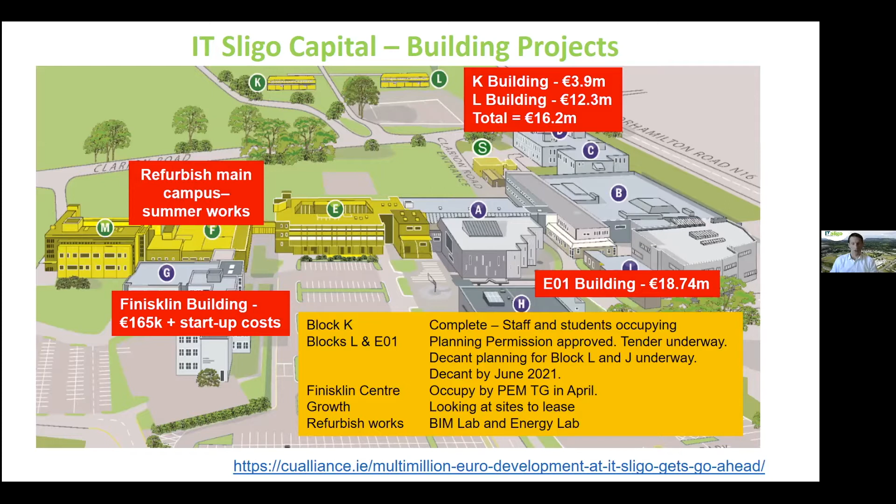There's also activity down in Finisklin, where we're looking at relocating the PEM Research Centre. There's future growth in terms of apprenticeships, and we're looking at some space at the moment to occupy. As part of the refurbishment of our existing facilities, we'll be putting in a BIM lab, which will have AR and VR facilities, as well as multidisciplinary collaboration opportunities with large touch screens. We're very excited about that initiative.

Just to fill you in, IT Sligo has been one of the pioneers in terms of online learning over the last 20 years, and I know all third level and secondary level for that matter have had to switch over to online delivery.

During the last number of years in particular, our department has strategic partnerships with various national bodies for the provision of education on a part-time basis online to various cohorts, including TII, the Local Authority Services National Training Group, Irish Water, Department of Transport, and SCSI.

In addition, professional accreditation is really important to us in our programs in terms of quality assurance, and also for graduates to have international recognition of their qualifications. We have recognition with SCSI for Quantity Surveying and Engineers Ireland for the engineering and civil engineering related programs. CIOB accredit all of our construction management related programs, and CIWEM accredit our water and wastewater programs.

This diagram is a progression path map of our online portfolio of programs that we've developed over the last 10 years or so. We have the largest suite of online part-time programs in the country relating to construction. Over to the right, we have construction economics all the way through to level 9 via quantity surveying, up to specialization in M&E quantity surveying, which is a new program delivered over the last year in collaboration with SCSI.

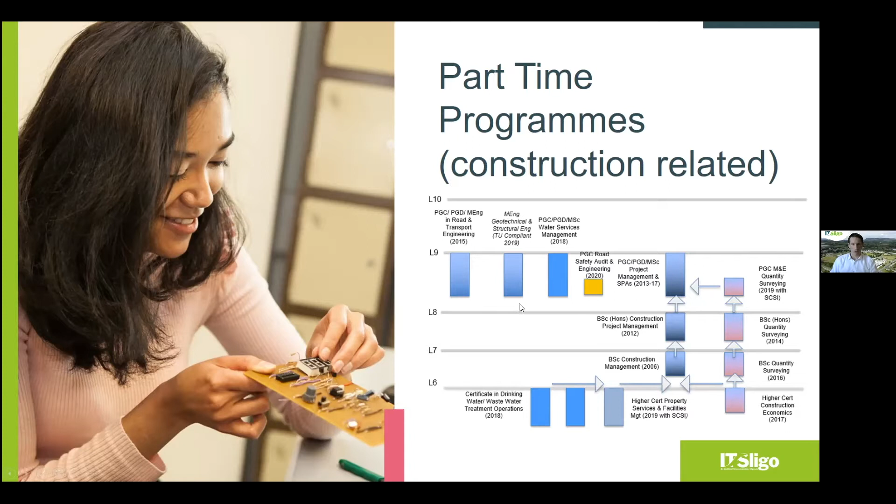And we have a TU compliant master's, which has a 60 credit dissertation in geotech and structural engineering. So there's great progression paths in those offerings that we have at the moment for anyone looking to upskill.

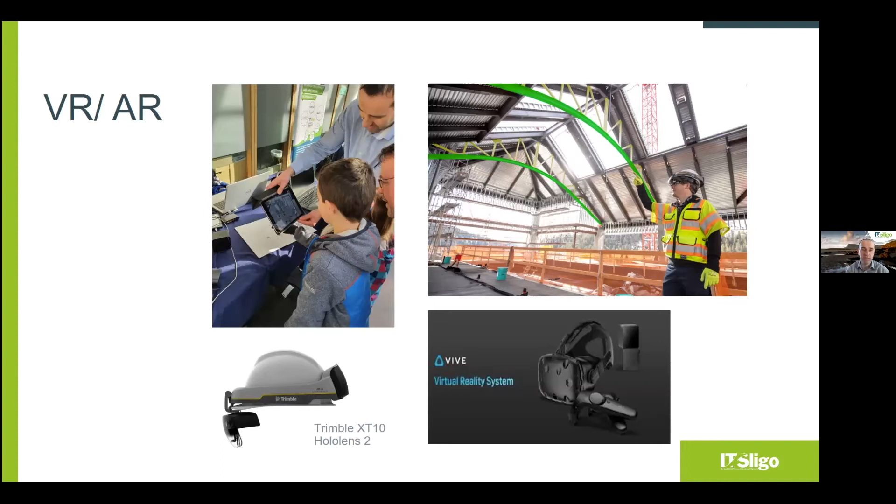That links into what Trevor mentioned earlier with having the BIM studio hopefully set up - we'll have a designated location where this technology will be, and we can have access to it. There's a lot of talk about a post-COVID approach.

As part of this, we have a new course that has been approved and will be coming online in September - a certificate in digital construction technology. It's a level 7 course, and this has been developed based on feedback from industry, giving a base level of understanding of BIM and BIM fundamentals.

It has 3 modules. It's designed to be delivered online as a part-time course, and it goes through building technology and building services, and in semester 2 it has a BIM and collaboration approach, and then a commercial construction element, linking in the geospatial approach from a surveying aspect, making sure that if you are working in different building models, they are working on the right coordinates, actually in the right location and not out by a different coordinate. That geospatial aspect is becoming increasingly important now, because a lot of it's been designed off-site and in a cloud-based approach with the use of BIM.

So that's hopefully that will be available. The website will be updated soon. So that's a new course and a new offering to industry, and that's based mainly on industry feedback. That's a very positive thing.

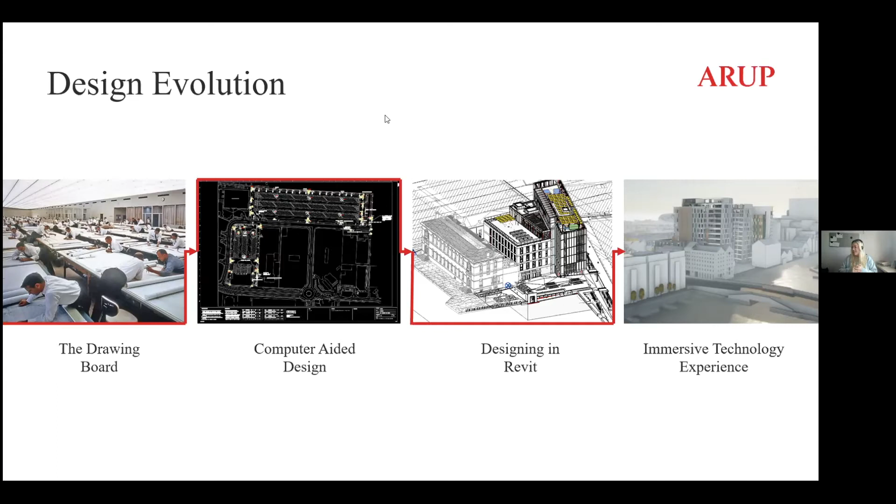This image, I stole off a colleague because I thought it was really great: the world's most valuable resource is no longer oil, it's data. Technology has increased so rapidly that we're completely immersed in data, and how we manage it and sort through it is so important. This is kind of what this talk is going to be about.

This is just a sample of what we use at ARUP during our design stage, but the next slides are going to talk through how we manage data, how we calculate data, and how we also coordinate and do clash detection.

Our main software that we use is Revit. I think like most consultancy firms, when talking about how we manage data, it is a database of structured data, and everything we use, like automation tools and software, is all linked to Revit. Before we had Revit, it was CAD, and that was unstructured data. Everything was 2D, and what you saw was the information that you got. It's just such a great tool for managing your information.

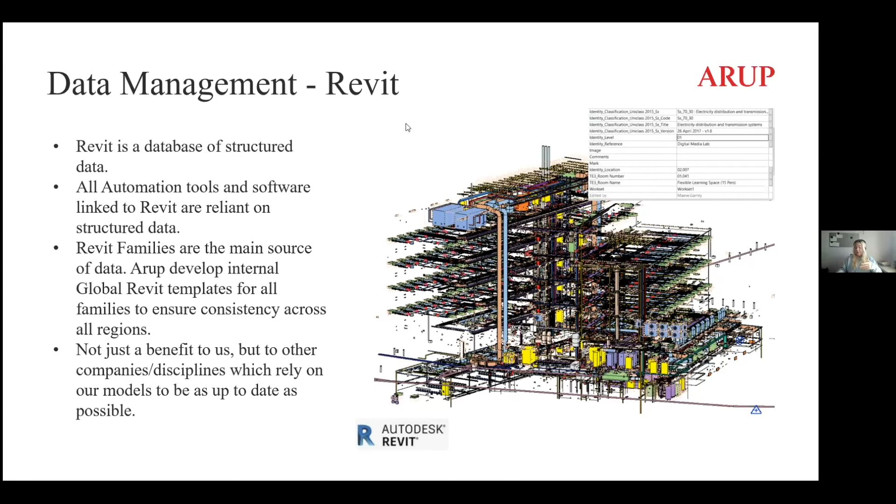Our main source of data is our Revit families. Internally at ARUP, we have teams that develop Revit standards and templates for our families, for our schedules, and for our checking views. That really ensures consistency across the regions. That's great not just for designing and for having our drawings consistent, but it's also really great for our automation tools, because if you have a Dynamo script that relies on certain parameters within families, that means all of our offices can use this Dynamo script, since we're using the same families and templates. It's a really great tool. It's not just good for us, but it's great for other companies and other disciplines that work with us who rely on our models being as up to date and informative as possible. It's a really well-rounded tool.

The first add-in I'm going to talk about is our Revit scheduling tool. Scheduling in Revit is really powerful and can be a great tool to use, but if it's not planned out ahead of time—at the very beginning of your project, figuring out how you're going to sort out your data and plan it—it can become a bit of a mess. You might end up with schedules that are half filled out, and you'll have to manually fill in all of these schedules.

Because it may look like Excel in your Revit schedules, it doesn't work like Excel. You have to fill every single cell one by one. So using RF tools and parameter transformers really streamlines this process, because you can export families and their parameters.

So what I'm explaining here is for circuits, looking at distribution boards. You have rows of circuits and all their parameters and information. You pick the family you want, using circuits, and pick all of the parameters that are going to be in the schedule. You export that to an Excel spreadsheet where you can filter and fill out the information really quickly and efficiently. Then when you're finished, you push that back through the parameter transformer, and it pushes all that information back into those families, so all of the schedules are filled out.

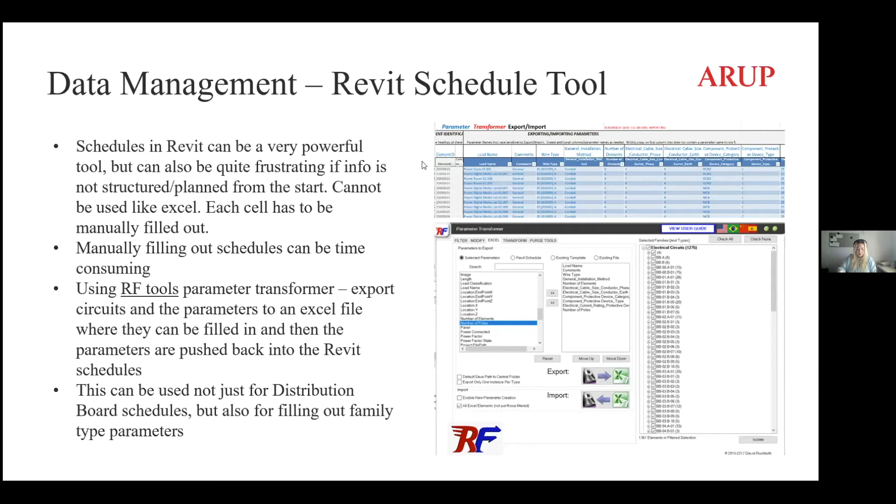So the next thing is checking schedules. For checking schedules, I think in ARUP we use checking views a lot. We have internally generated checking views that are layouts that basically filter properties and parameters by color. The mechanical team uses them a lot for checking airflow, and we use them for checking that everything is circuited well. I think checking schedules are really fantastic, because they're just a great way of checking your parameters and your families.

So I used them in my last project really well for checking data points. Within the project, we had 3 different comms rooms, and we wanted to end thousands of data points in the building. We really wanted to make sure that none of the data points slipped through the cracks, that none of them was left without a comms room associated with it. So in all of the comments for the data points, we associated it with a comms room for where it's originating, and each room had a schedule, which was a really great way of checking how many points, which then led to an easy way of sizing comms racks and sizing the rooms.

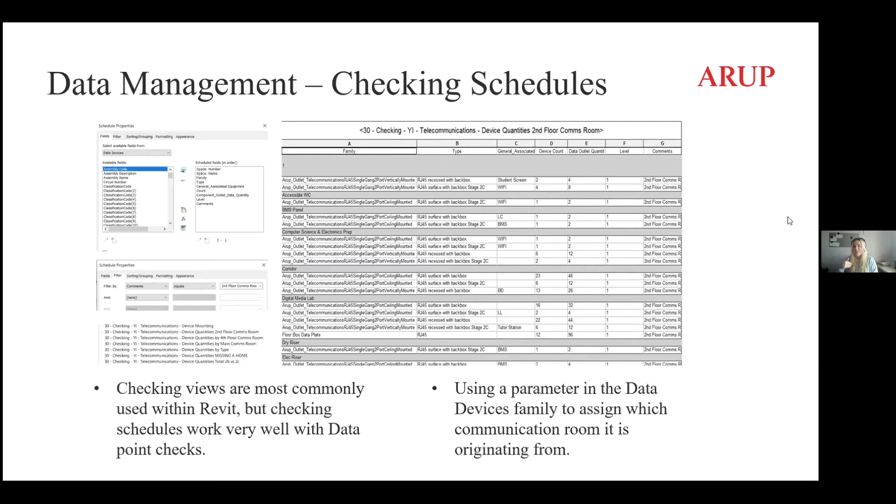So the next one is Smart Schematics. Every single project has LV schematics, MV schematics, single line diagrams, and we use Amtech, which is software we use to map out our distribution plans for LV and MV, and it also calculates your cable sizes and breaker sizes. We do that for every project regardless, and we have an Excel cable schedule exported from Amtech, which is usually a deliverable on its own.

It has all of the cables and their associated information, breaker sizes, cable sizes, everything. Before this Dynamo script, we were relying on somebody to go in and manually fill that information into your Revit schematics, and it took a long time. It could also bring up human error - there could be discrepancies between the two. So this Dynamo script really helps with that.

It takes all of the information from the Excel cable schedule and pushes it into the Revit schematic, but it relies on unique identity references, where we associate the same number, the same name in the Amtech calc as we do in the Revit. So the Dynamo script knows that this breaker is the same as that breaker and will fill it out with the correct information.

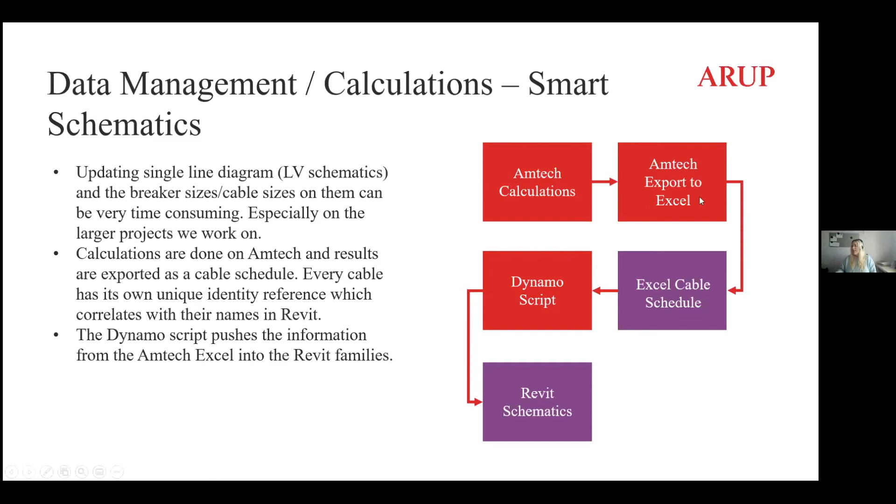And I think that's a common thread with the Dynamo scripts: you need to plan it out and make sure everything has the right name, all the naming criteria is the same, because if you mess that up, the Dynamo script won't work well.

So the next Dynamo script is looking at your Dialux Evo calculations. We use Dialux Evo for lighting levels and uniformity, a lighting calculation software, to get all that good stuff for lighting. You're modeling in Dialux Evo, getting your calculations to standard, but then you're having to do that work again by modeling in Revit. So you're basically just doubling up the work.

So the automation team developed a Dynamo script that, the same way as the last one, takes a luminaire type from the Dialux Evo file and pushes it right into the model in the exact same position. The script takes the XYZ positioning of that luminaire and pushes it into the exact same spot. But again, it's reliant on making sure the naming criteria of that luminaire in Dialux Evo is the same as the luminaire family type in Revit.

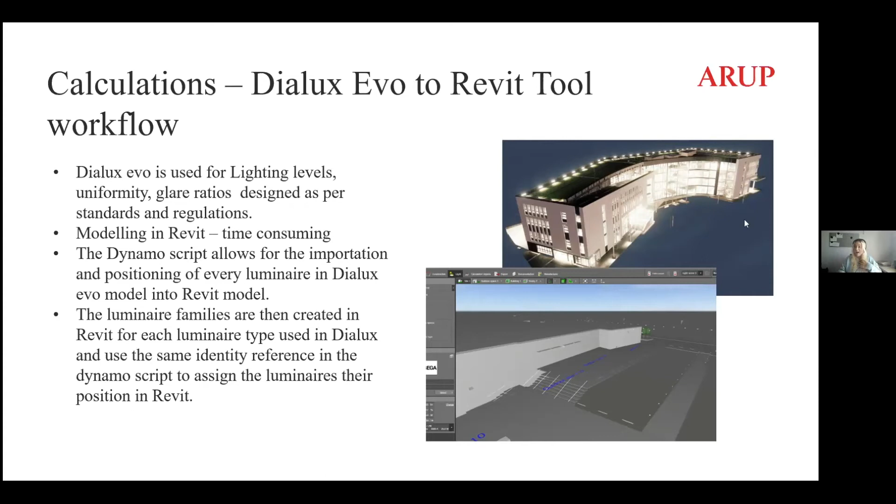And it's really great because it cuts down the time on modeling in Revit. It also probably cuts down on your eye strain, because you're not staring at a model for hours trying to get the modeling done. So I use this very frequently, and it's fantastic.

And then the last Dynamo script is a really quick one, for fire alarm systems. It basically allows for the quick placement of fire alarm detectors as per the standards. You know that fire alarm devices have to be placed a certain distance from other devices and a certain distance from walls.

So when we create our Revit models, we also create an accompanying spaces model, taken from the architect's rooms that they send us. Each space will have boundings, height, width, and length. The script will take those boundings and place a detector accurately in the model in those spaces as per the standards. So if a room is more than 8 by 8, it will place at least 2 detectors in the room on the ceiling in the right spots.

So it's a really useful tip to just get all your detectors in at once, and then you can maybe fiddle around with them. But it's just a really efficient tool.

And I think with anything Dynamo, scripting, and automation wise, if you have something that requires a rule coming from standards - like fire alarm detectors can't be more than 6 meters from another detector, or 4 meters from a wall - if there's a rule like that, it can be automated. That's kind of how our automation team is looking at it, trying to develop more tools. It's a really easy way to weed out which things can be automated.

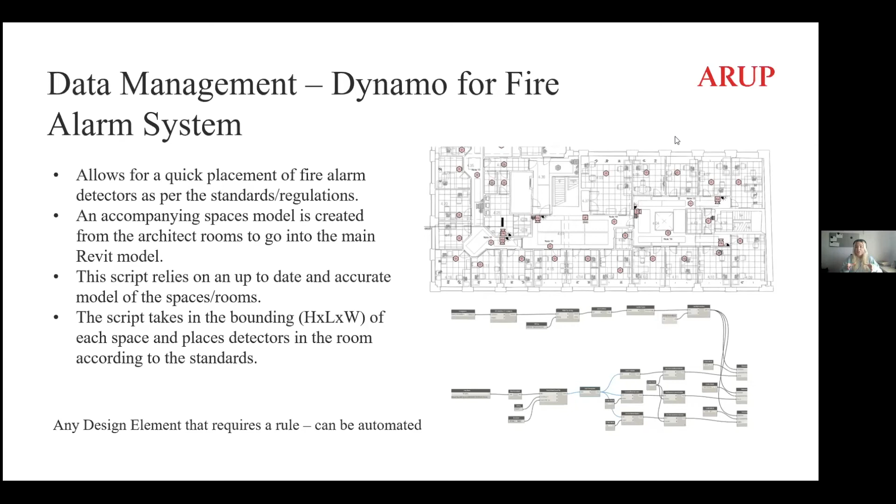So moving on from data management and calculations to more coordination, we've been using BIM 360 a lot more frequently for projects these days, because it's not just a common data environment, but a way that we can make a lot bigger Revit models, since we're not relying on our network and not getting the lag and connectivity issues of being on our network. It's a really great tool, but it also lets you track your design progress and version history.

It's also great for sharing your models. That's become a lot more common, where maybe every 2 weeks you're sharing models with the architect and other consultancy firms. BIM 360 really streamlines that, because you're not having to download the model off Revit, clean it, and upload it back onto a platform online. You're just sharing it within BIM 360, and it really makes it more efficient. It also is the single source of truth.

It's the one place that everything is updated. That's where you look for all your information for everyone. And not even in the design stage, but if you're doing on-site inspections, it's really great to have on site. You can have it on your phone or tablet and be looking at drawings or 3D views while going around site doing inspections. So it's a really handy tool.

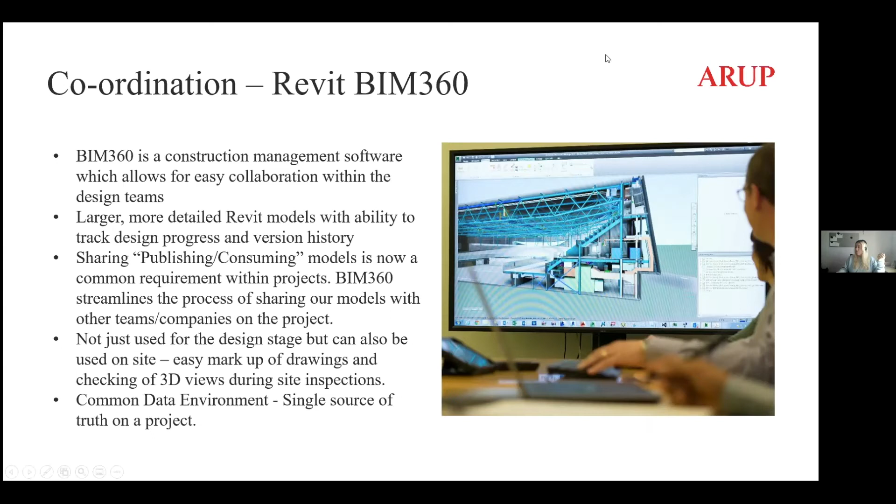So then moving on to clash detection. We use Navisworks for clash detection, and it's great because it supports coordination and assists to identify design issues encountered during design stages. It allows you to walk through the model like you're in the building, and you can tag any clashes or mistakes in the model or anything you want to alter. You can tag it and put in comments or review clouds, and those are saved as viewpoints. So even when we're going through design team meetings, you can export these as reports and have a really nice, concise report of clashes.

Now, even though we are doing this as an addition, the project lead will usually run final clash detection and issue reports. We just use it internally during the design stages to really hone our coordination and make it a lot more effective.

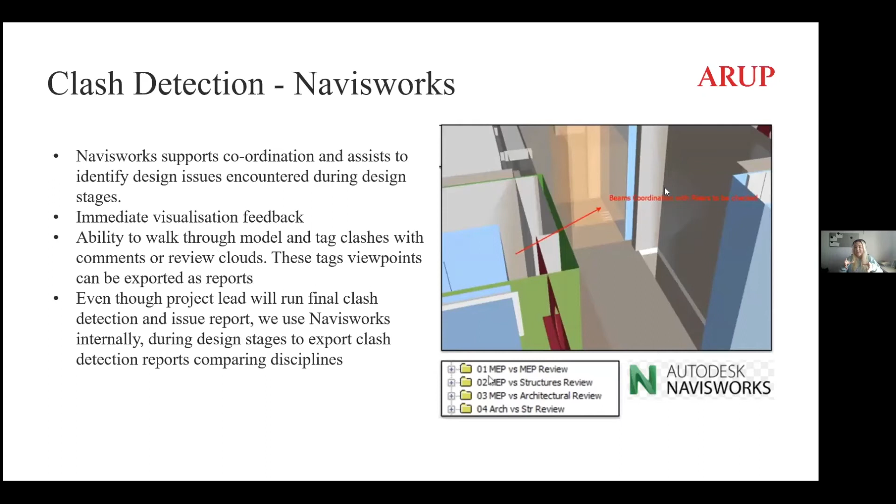But this is really dependent on receiving up-to-date models from architects or structural engineers, because there's no point running clash detection if walls move or doors move or things aren't up to date. It's also very important because more projects are requiring walkthroughs toward the end of the design stages from the BIM execution plan. It's becoming more of a requirement to walk through and make sure everything looks right in 3D, so you don't have a light a little further down from the ceiling than it should be, or a socket floating, or a pipe sticking out of a wall somewhere.

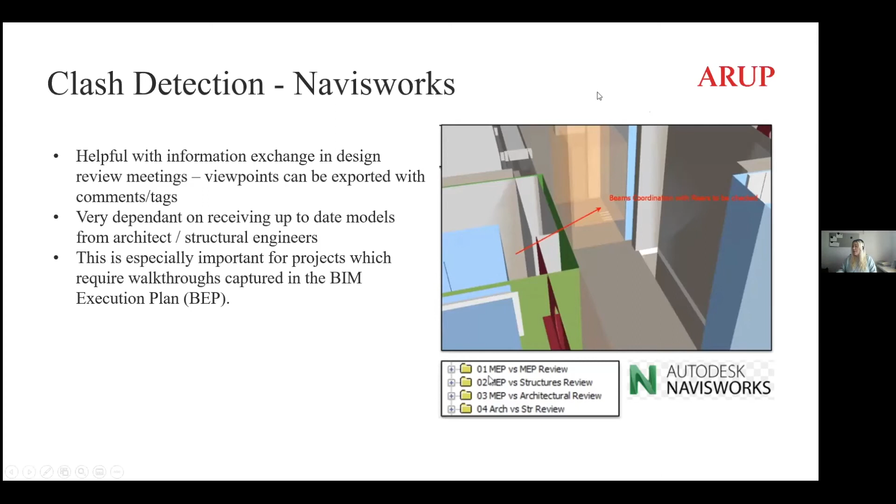Yeah, so it's just a really great tool. And then looking at visualization, Enscape is a great software. It drastically reduces the time frame for us to create visualizations within our projects. You can export images, do walkthroughs, export models for your virtual reality software, and it creates a really great high quality render that allows you to really see the project you've worked on and have it come to light as a really great model.

And we've had really fantastic feedback from clients by bringing them in, strapping the headset on them, and then being able to walk through their building and see it as an actual building rather than drawings or Revit models. It's been fantastic.

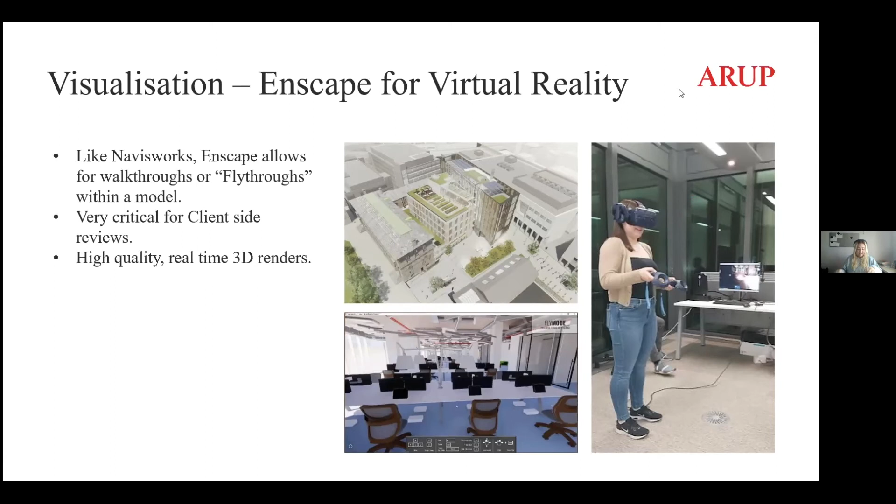And so just to quickly wrap it up, looking at Arup and future development, as a firm we aspire to be the leading digital consultants in the built environment, and we're continually developing new tools and new automation scripts. But it doesn't matter unless they're being used on all of our projects, because I think there could be a bit of a stigma that if you're working on smaller projects or projects without a long time frame, you don't think you need to use them.

I think that's one of the main things we're looking at right now: on every project, no matter what size or time frame, at the very beginning we want to have digital inception meetings where you plan everything out and plan to a T every tool you're going to use and every script for automation and digital. It really helps later on because it's a very cohesive plan. You're not halfway through a project thinking that could have worked a lot better if we did it this way. So I think that's a really important part of projects.

And I really like this quote from our digital team: embracing our digital future to deliver greater opportunities for Arup, for our clients, and for the wider world. And that is really important because at Arup, we want to shape a better world.

It's all well and good if we're trying to be at the forefront of digital innovation, but it's not going to make a difference unless we help the rest of the industry get there, and we promote a shared ethos of shaping a better world across the entire industry. We'll get better projects, more effective and better quality projects from that.

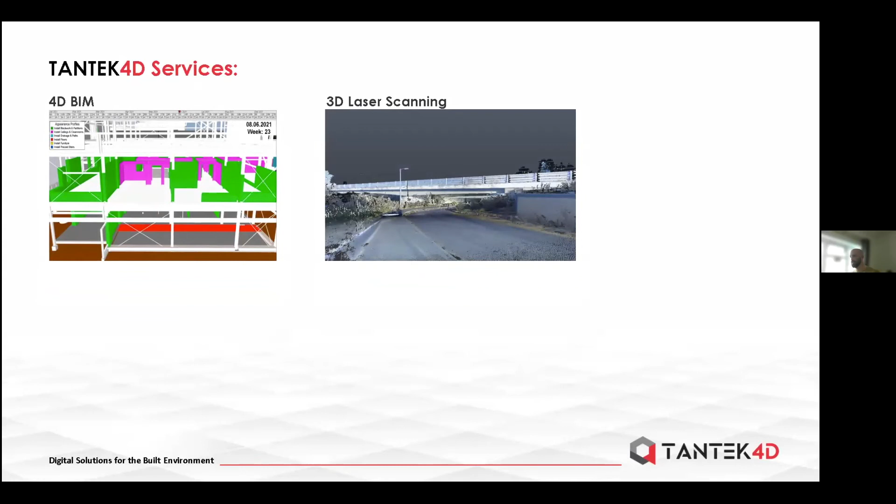So Tantek 4D services. We provide 4D BIM, we provide 3D laser scanning, BIM coordination, 3D digital animations, and digital strategy consulting.

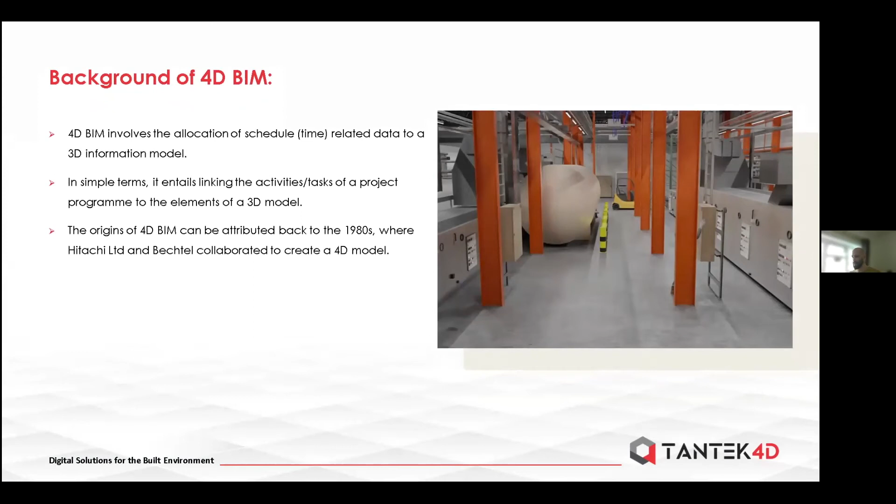So what is 4D BIM? A little bit of background: 4D BIM involves the allocation and linking of schedule time-related data to a 3D information model. In simple terms, it entails linking the activities and tasks of a project program to the elements of a 3D model. The origins of 4D BIM can be attributed back to the 1980s, where Hitachi and Bechtel collaborated to create a 4D model. During the 90s, Fischer and Associates at Stanford University worked on the creation of 4D simulations, and more recently, high-profile clients such as Microsoft and Amazon have started requesting its inclusion on their projects.

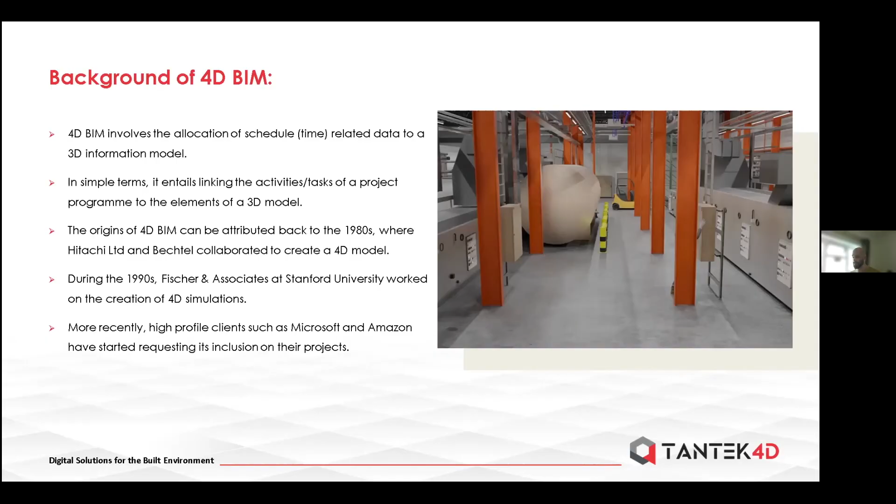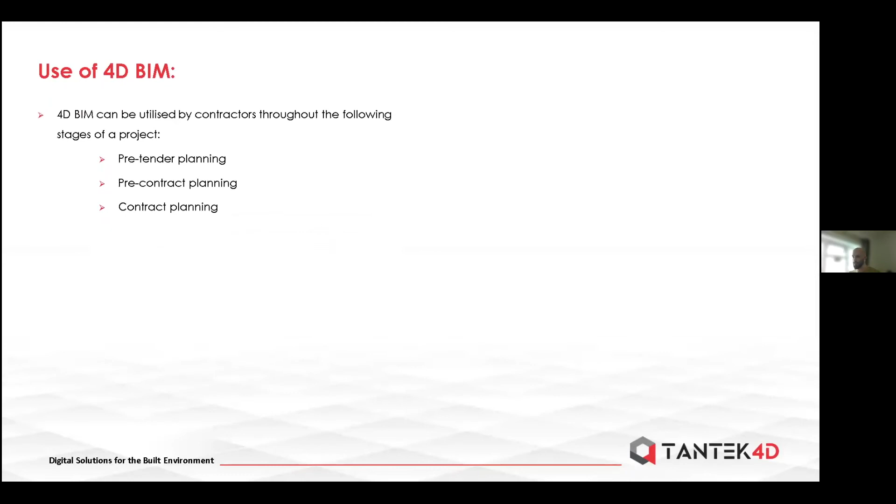So the use of 4D BIM. It can be utilized by contractors throughout pre-tender planning, pre-contract planning, and contract planning. But we feel it's best suited for scheduling critical projects such as interface works, for example crane strategy avoiding clash, complex refurbishment projects, large maintenance projects, new capital projects, and high-rise construction.

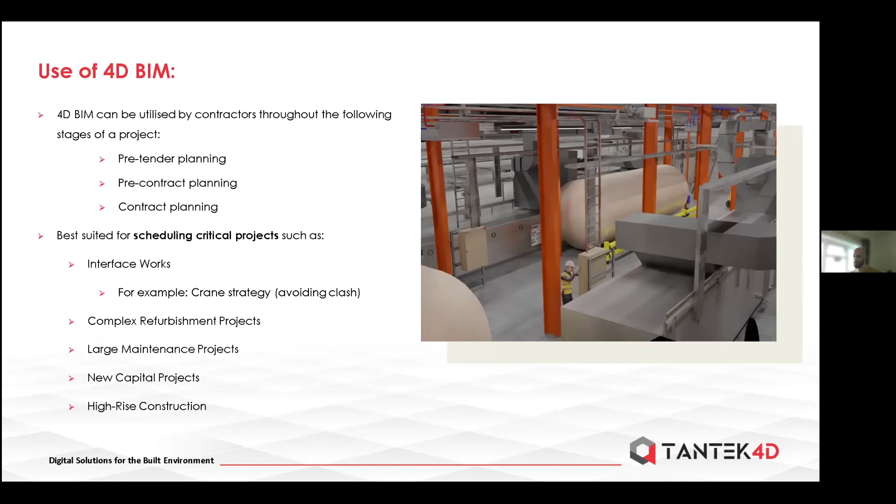So specific applications of 4D BIM: spatial planning, constructability analysis, logistics management, crane lift strategy, risk mitigation, health and safety management, and sequencing of works.

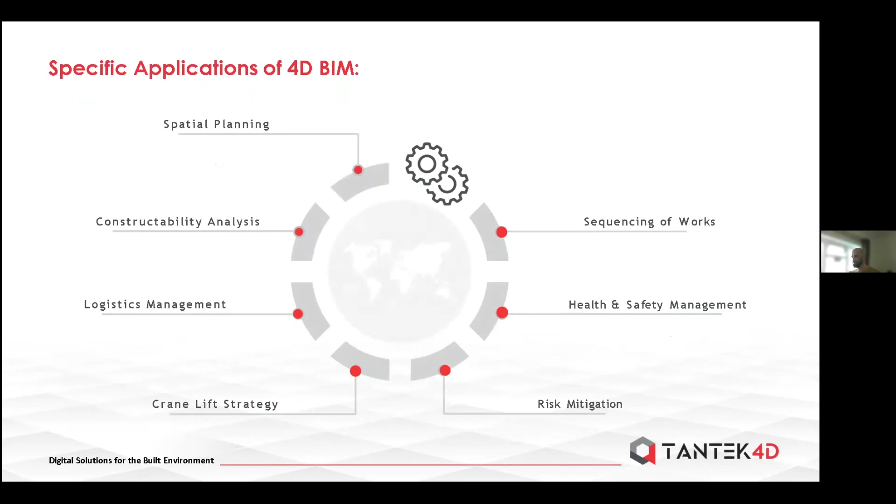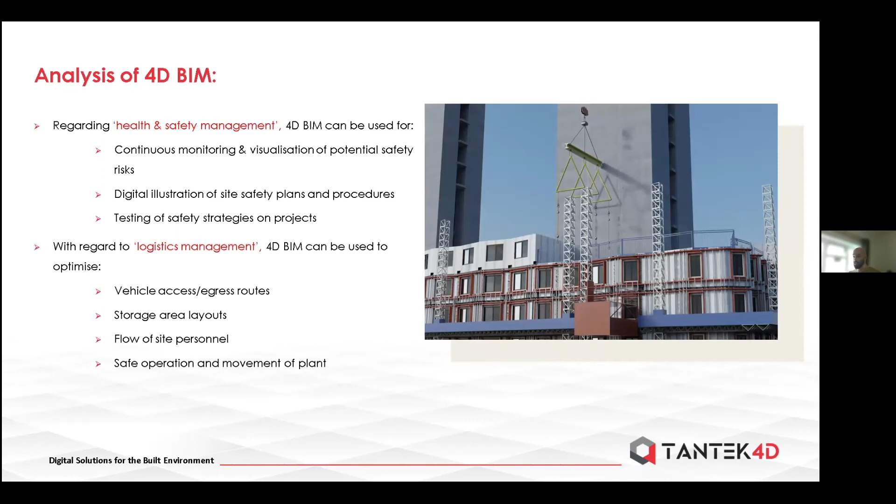So the analysis of 4D BIM. Regarding health and safety management, 4D BIM can be used for continuous monitoring and visualization of potential safety risks, digital illustration of site safety plans and procedures, and testing of safety strategies on projects. With regard to logistics management, 4D BIM can be used to optimize vehicle access, egress routes, storage area layouts, flow of site personnel, and safe operation and movement of plant.

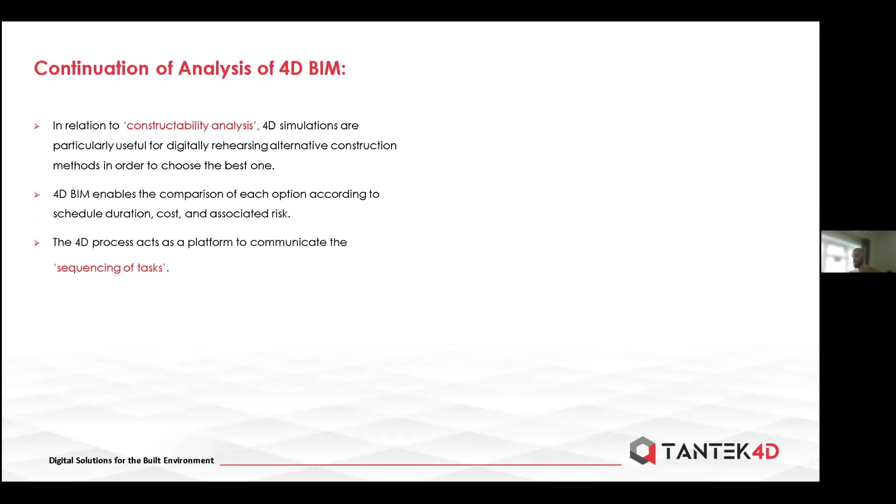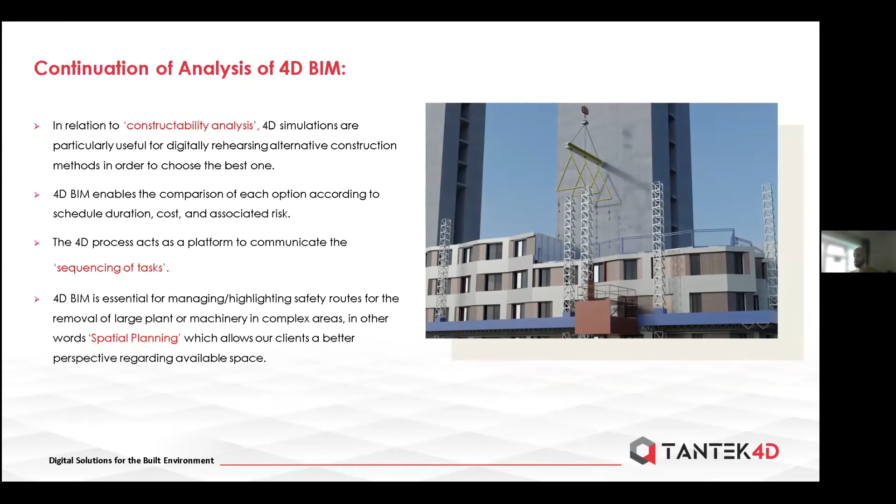A continuation of the analysis of 4D BIM. In relation to constructability analysis, 4D simulations are particularly useful for digitally rehearsing alternative construction methods in order to choose the best one. 4D BIM enables the comparison of each option according to schedule duration, cost, and associated risk. The 4D process acts as a platform to communicate the sequencing of tasks, and it is essential for managing and highlighting safe routes for the removal of large plant and machinery in complex areas. In other words, spatial planning, which allows our clients a better perspective regarding the available space.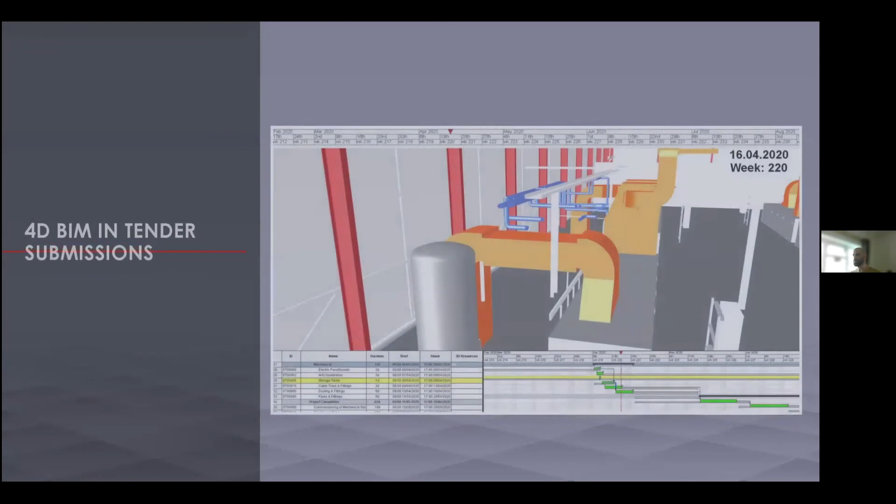So 4D BIM in tender submissions. Effectiveness of 4D BIM in tenders: the COVID-19 pandemic has been a key driver towards the digitalization of tender submissions. As part of the bid evaluation process on complex projects, clients are starting to demand the use of 4D BIM in developing effective risk mitigation strategies. During the procurement phase, 4D BIM enables a more informed comprehension of the construction process, testing the feasibility of the project strategy, validation of the project phasing plans, confirmation on the robustness of the tender, and a reduction in the risk profile.

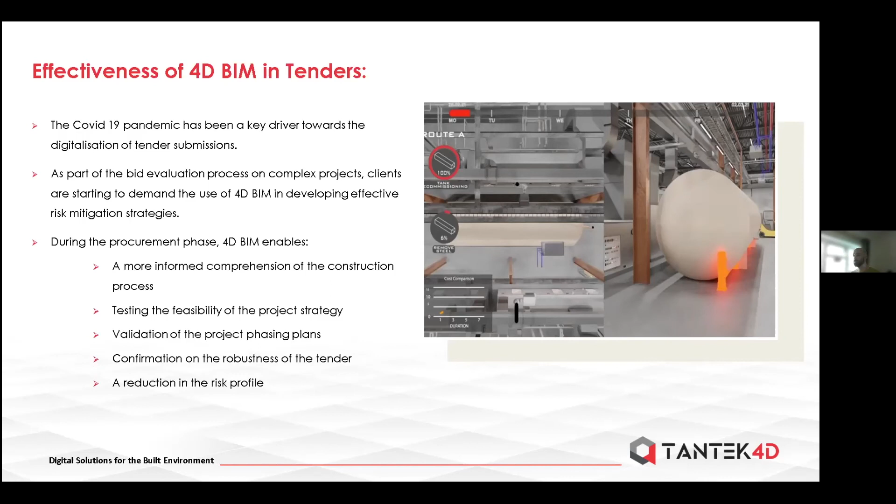Digitalizing tender submissions. The benefits: it improves competitiveness, it improves submission, it enhances communication, displays certainty in project methodology, aids demonstration of risk mitigation strategies, improves visualization of the actual construction methodology, improves the overall quality of bid submission, demonstrates safe spatial planning, and portrays a move towards digitalization.

So what Tantek 4D can do. At Tantek 4D, we help contractors win bids by offering a number of key bespoke packages, which can be combined to suit the bid submission requirements.

Health and safety animation: we create and animate our clients' regulations and procedures intended to prevent accident or injury in the workplace. 4D simulation: we can animate our client's program and visualize how the project will develop based on the client's requirements.

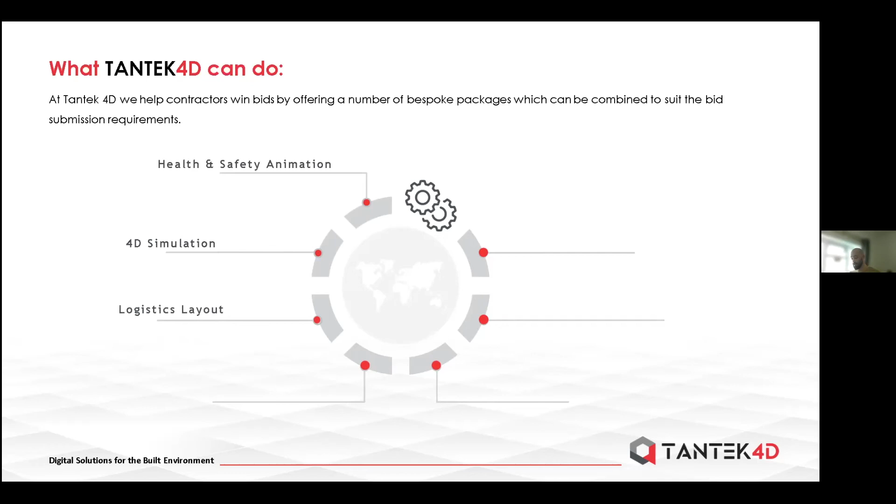Logistics layout: we can also help our clients visualize vehicle access and egress and how to avoid disturbing the flow of public transportation, and we can show welfare office locations through a stage-by-stage process.

Crane lift strategy: again, a major asset of 4D BIM is identifying crane locations and having the ability to highlight crane turning circles to showcase potential clash.

We also produce project videos. Having the capabilities of producing an animated project video at tender stage allows our clients a much better competitive edge. It allows a more detailed perspective to all stakeholders involved, which in turn gives our clients that edge on their competitors.

We also produce corporate videos, so we have the capabilities to provide our clients with corporate business identity videos. It allows them to showcase their business model and services when tendering for specific projects. It would highlight the facility location, we would create branding graphics, and showcase external and internal facility processes, all in high quality 4K resolution.

Welfare layouts, similar to our logistical layouts, we can showcase and highlight through animation the location of site welfare offices on a stage-by-stage process and the effect it can have on the overall project.

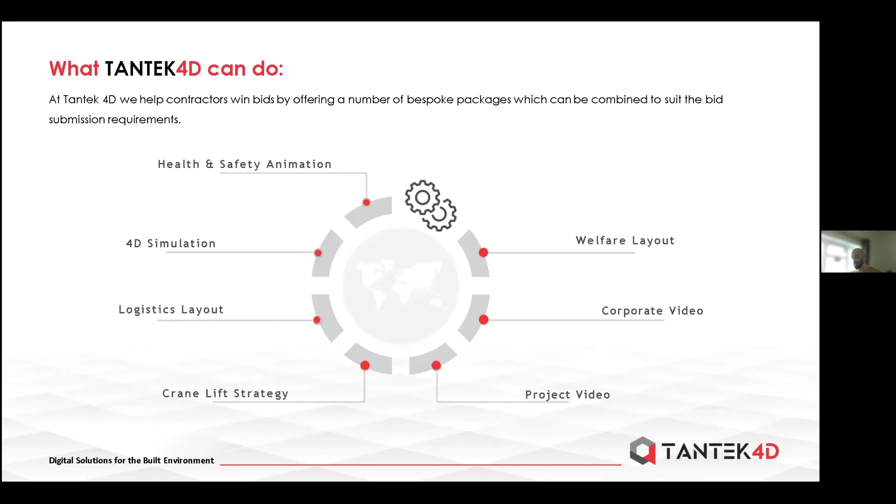And then our 4D workflows, from project concepts right through to project completion. We understand the client's brief, we develop 3D models in-house, or we can manipulate existing 3D models to accurately showcase the client's brief. We collaborate using a wide variety of BIM and animation software to capture the requirements efficiently. We also coordinate workshops both internally and externally with clients, visually showcasing the project methodology. And with the aid of 4D software, we can link all the 3D models to the desired construction schedule to develop a movie animation.

For client project satisfaction, these animations support our many clients to deliver a successful tender package, which gives them the competitive edge. Stakeholders have a better overall project perspective based on the 4D simulation and animation, giving our clients a greater chance of winning that specific contract.

If successful, the 4D construction simulation can also be used during the construction stage to visually present the project process and the what-if scenarios, such as site logistics, temporary works, scheduling, and many more.

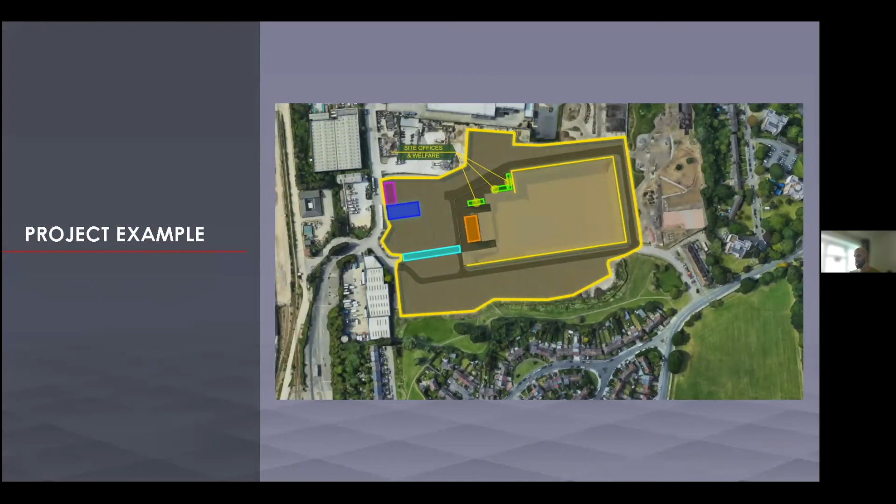So just for a project example, this is a project that's live and ongoing currently. So just the project overview then.

Our client is a tier 2 contractor located in London, UK. The client objective was putting together a tender package for the groundworks and basement construction phase for a mixed use residential development worth an estimated total of 7 billion. The proposed facility has parks and playing fields, office space, new homes, restaurants, sports and leisure facilities. You can imagine it's a quite substantial contract for our client, and our client fully believes that 4D simulation will benefit their tender submission and give them a competitive edge.

So understanding the client's brief, we clearly identify the site location with animated site introduction, highlighting the main access road, the construction vehicles, the general operatives, and identifying the perimeter of site hoarding, locating the site access gates, parking facilities, laydown areas, and site welfare offices.

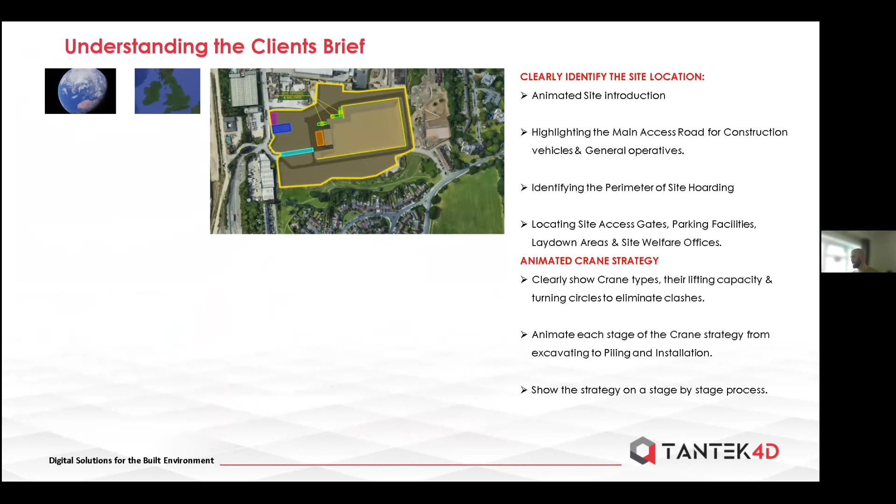And then we also do an animated crane strategy where we clearly show the crane types, their lifting capacity, and the turning circles to eliminate clashes. We animate each stage of the crane strategy from excavating to piling to installation, and show the strategy on a stage-by-stage process.

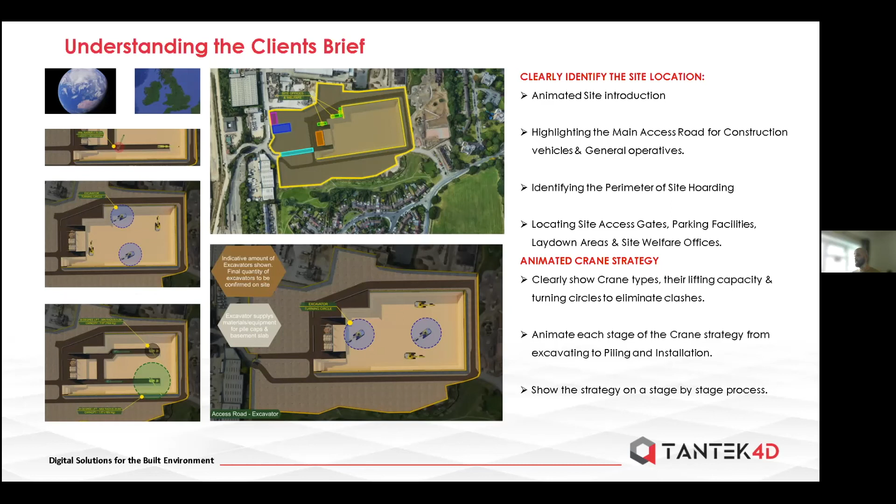Developing the 3D models, we develop them based on the client's information. We either create them in-house or from 2D information, or we manipulate the received models to achieve the end result.

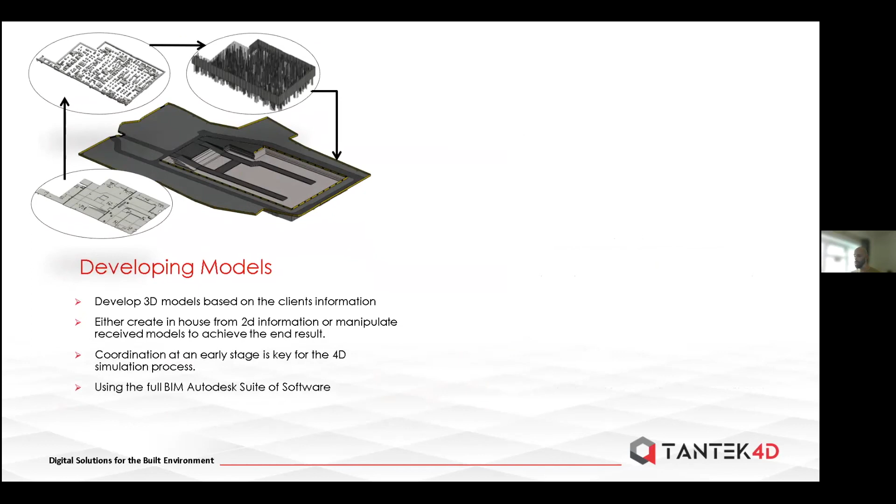Coordination at an early stage is key for the 4D simulation process, and we do this using a full BIM Autodesk suite of software. We collaborate all the models and bring it to a stage where we can capture the brief and animate it. While creating models is a key process, animation is probably the most important aspect - it effectively brings all the 3D models to life. The team must be efficient with common data environments to communicate efficiently.

We do this using a wide variety of animation software such as Autodesk 3ds Max, Lumion, Twinmotion, Unreal Engine, and Blender.

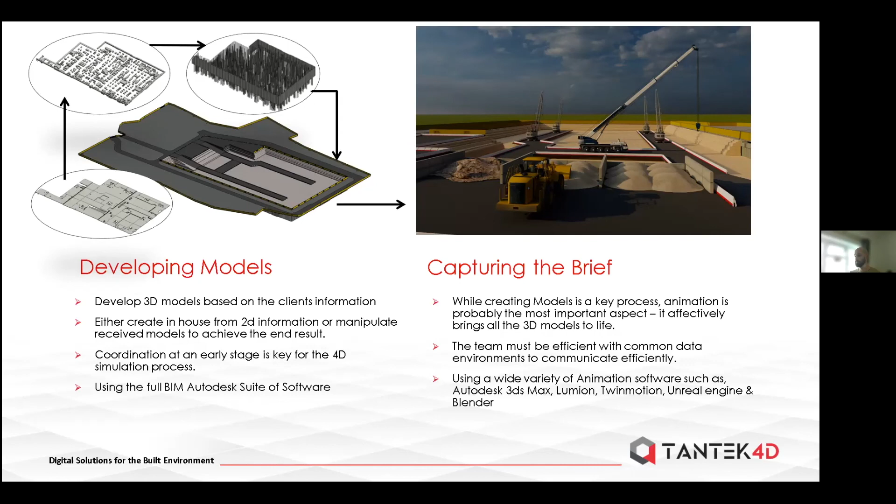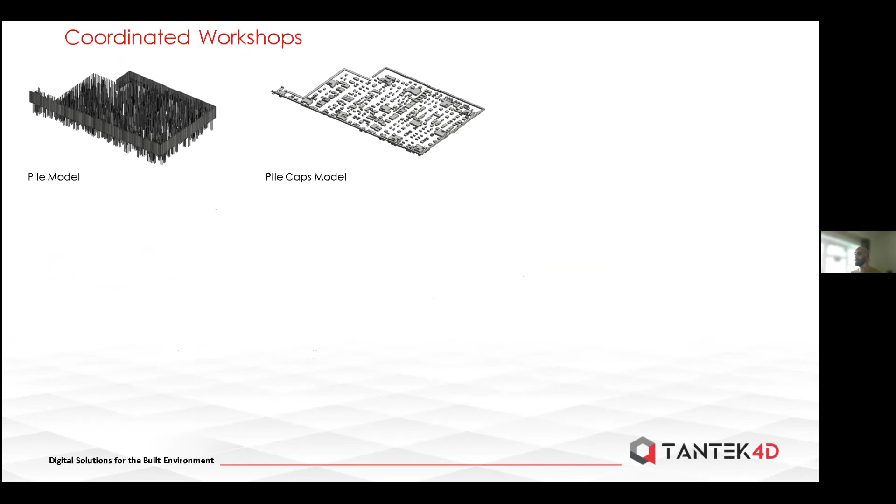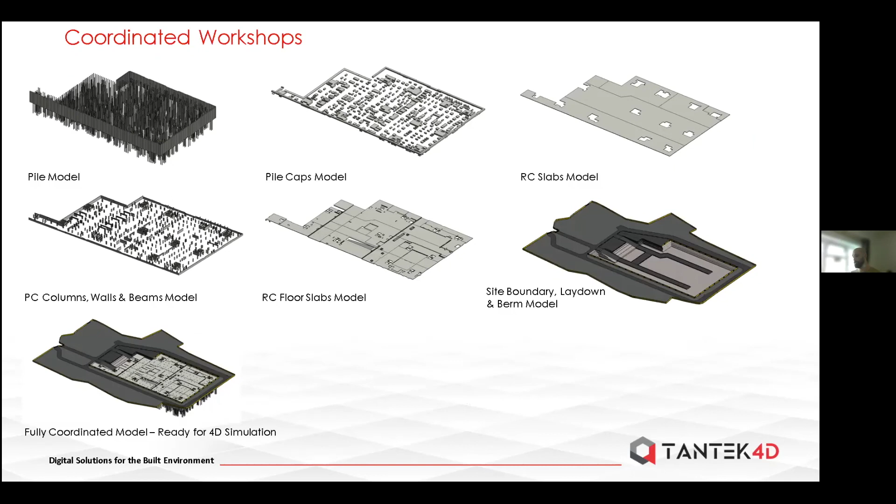So for the coordination workshops, we can either create models in-house or manipulate existing models that come in. In this case, we created the models - a pile model, a pile cap model, RC slab model, PC column, walls, beams, etc., RC floor slabs, and then we put together a site boundary, laydown, and berm model. We linked all of those models into a fully coordinated model, which is ready for our 4D simulation.

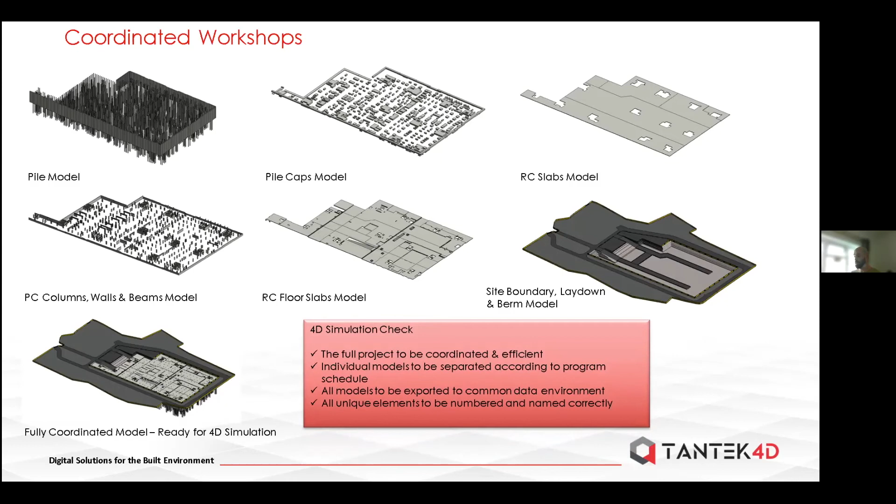So at the end, we do a 4D simulation check. We make sure the full project is coordinated efficiently, individual models are separated according to program schedule, and all models are exported to a common data environment. All unique elements are to be numbered and named correctly - that's a key point, because doing that allows us to be ready for our 4D simulation.

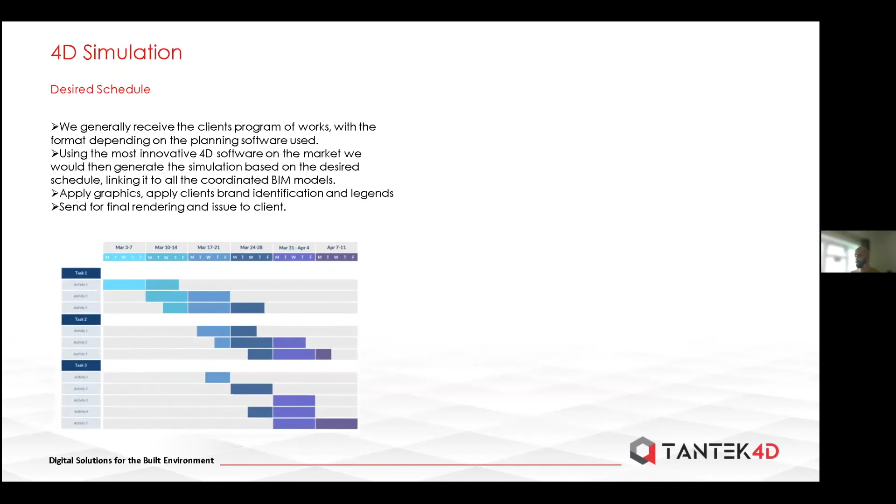So then getting on to 4D simulation and the desired schedule. We generally receive the client's program of works with the format depending on the planning software used. Using the most innovative 4D software on the market, we would then generate the simulation based on the desired schedule, linking it all to the coordinated BIM models.

We apply graphics, we apply client's brand identification and legends, and then we get the approval from the client, and then we send for the final rendering and issue to client.

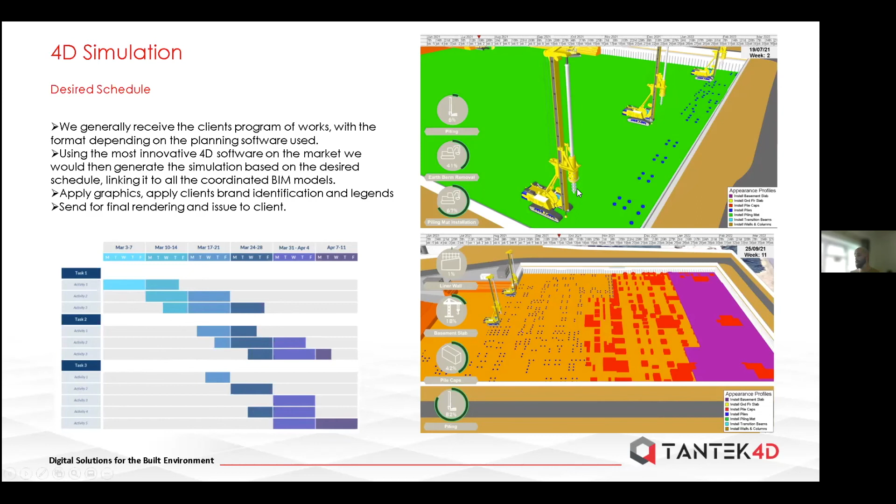You can just see there, this is a specific piece of data that we would get from the client, and we would bring that piece of data into our 4D software and generate time and generate an animated movie to showcase how the project is going to develop over time.